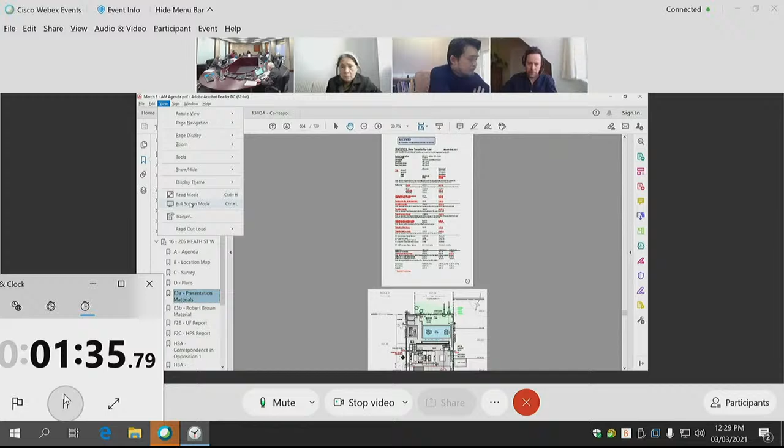Included in the package are some maps that show the range of densities and heights approved in the broader geographic context. Those are maps that we've often presented. Thank you to committee staff. That's the map showing the density numbers, and then there's another map right after it that shows heights. I would just say there are a range of both densities and heights approved in the area.

Both of the numbers, if we just look at the numbers, would fall within the range of those approvals. There are heights exceeding that sought by ours, and we've charted some of the heights there. FSIs all above 0.7 into the high 0.8s, and even further north in the neighborhood, some that are over 0.9. So just the numbers themselves, we think, fall within the range of the approvals.

From a qualitative perspective, I just wanted to talk about the FSI and height again from that perspective, because I think that matters as well. The numbers tell only a part of the story, as the committee knows.

The site plan that's included, and I thank committee staff, if I could just go back up to that site plan, there's a dotted red line on these site plans that we prepare. It shows for you, the committee, the permitted envelope based on front yard setbacks, length, depth, side yard setbacks. You'll see on the right-hand side it says permitted outline. So that's what would be permitted in terms of a house today.

I would just note that only the one-story portion projects beyond that permitted envelope, and we've highlighted that there's the one-story projection being hatched. It then goes to the outdoor platform area at the rear. The two-story portion actually has a length and depth of just about 18 meters, depending on whether it's length or depth. So only marginally in my submission to you above the length and depth that you would see permitted for the two-story portion of the house.

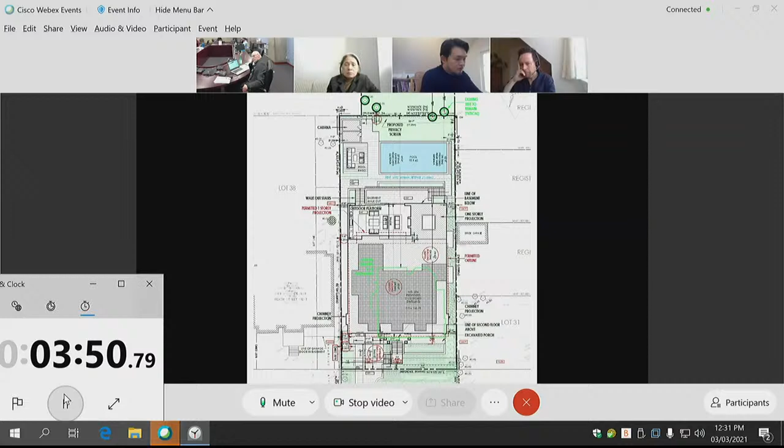And so it's been well set up on this lot, we believe, in terms of its adjacencies. In terms of height from a qualitative perspective, I would just say to the committee, it's an odd stretch. We don't often have situations like this. There's only 3 lots on this south side of Heath. And 201 Heath, which is immediately adjacent, does have that approved height of 12.72 meters.

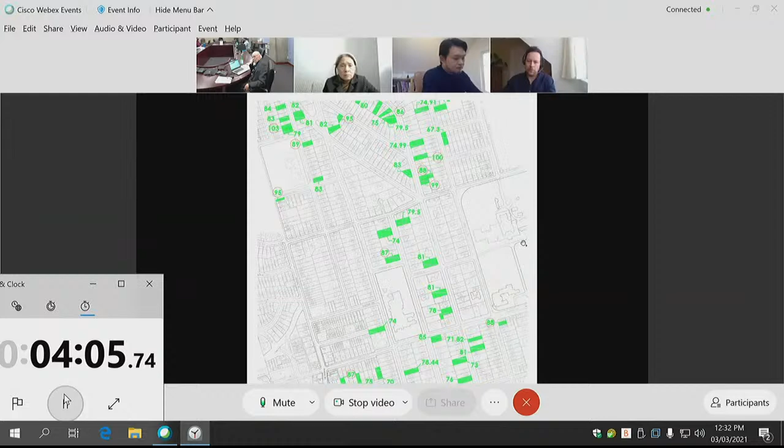And so we think in terms of just these 3 houses on the street, numerically the height obviously exists, but it's actually going to match up well and be compatible with its adjacent neighbor, and therefore respect and reinforce the existing character of the neighborhood. The next house is then the flankage house on Spadina, so you don't have that same adjacency.

We understand some concerns at the rear about landscaping. I'm happy to talk about those in terms of questions from the committee. But I would just note that the one-story portion is 16 meters from the rear lot line, and it's another 6.5 meters to the two-story structure, for a total of 22.5 meters. So quite a distance from the rear wall of the two-story or 2.5-story portion of the house to the rear lot line. I'm just over my 5 minutes, sir, so I was going to stop there.

No, sir, I just said the same thing. I know my 5 minutes is up, and I was just going to stop there unless there are any questions from the committee.

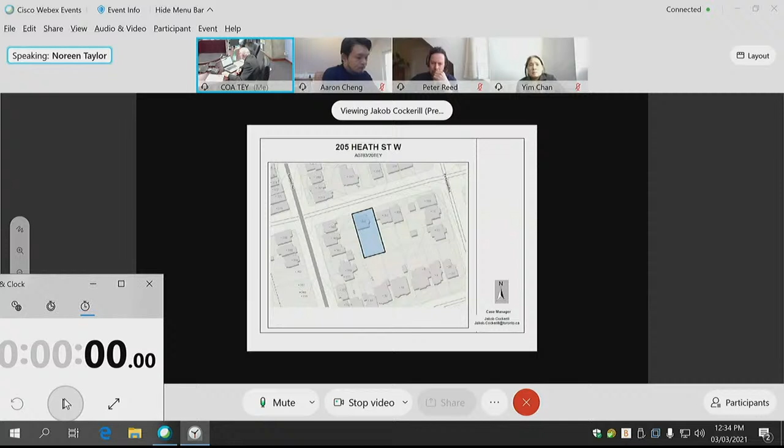Hello, it's Noreen Taylor speaking, and I live directly across the street, actually across the street on a slant. I'm Noreen Taylor, and I am the owner of 208 Heath Street West, which is directly across the street.

I also should say that I knew the former owner, Mrs. Bennett, who lived at 205 Heath, and she was my friend and a great gardener, and that colors some of my remarks. I've lived in my home for over 30 years.

From reading the letters submitted to this committee, it's clear that the consistent objection to what is being presented is that the variances are not within the realm that should be considered in this forum. The request in item number 10 that the floor space index variance of 0.87 times the area of the land is not a minor variance. This especially when the permitted floor space index is 0.35 times the area of the lot.

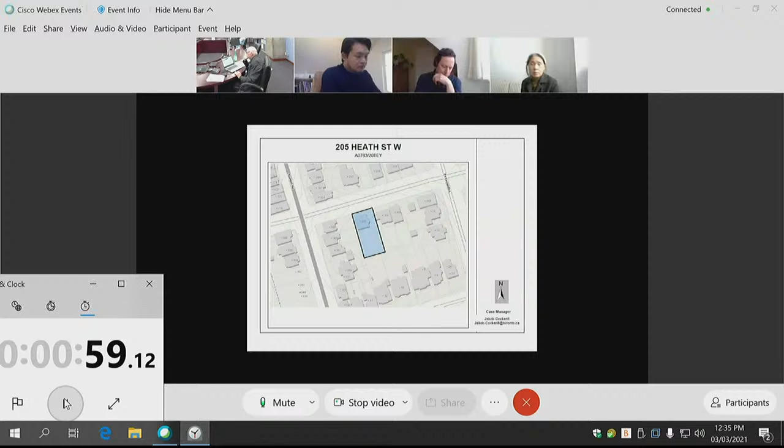While there might be examples, and Mr. Wengel's office assures us that there are, of 80+% coverage in the neighborhood, it must be plainly stated that there are no examples of this extent within this little neighborhood. The residents of the area in question, it's a very small block that has maybe 5 houses on the north side of Heath Street, 5 houses on the south, a few houses on Parkwood, and the same low a number of houses on Shorncliffe.

By changing the nature of this house, by having this variance be exceeded so much, it really is going to be changing the nature of what this city is about and what this city block is about. Again, I've been in this community for over 30 years, and I didn't want to live in a place with palaces. I wanted to live in a leafy garden setting.

Directly across from this person, I have a lot that's roughly 84 feet in dimension. If I were to apply the same kind of building variance required, we'd be looking at an entirely changed community, and I'm not so sure this is the direction that the City of Toronto wants to go to. We're looking at creating greater density for people, not looking at creating palaces for people.

One of the residents on the street, Mr. Lee Weston, used the word leafy to describe the ambience of this community. And I would suggest, as you look here at the nature of the lack of garden where the pool is, which has now been changed in subsequent iterations I've seen, the amount of green space is negligible. I have concerns about how water will drain if everybody in this neighborhood has the same amount of built form. I'm not sure our sewer systems will be able to cope or where it will drain off to.

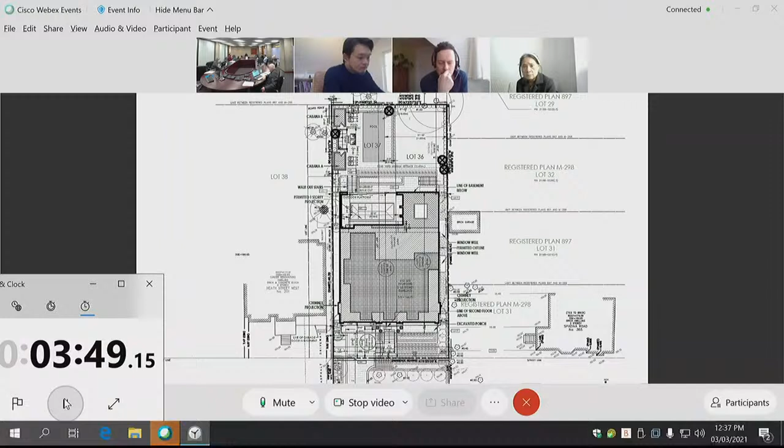I suggest that the building of this sort does not keep to the original zoning criteria and is not what the city was designed to do. I'm suggesting that this application be either deferred for neighborhood consultation or in fact be applied for rezoning because it is at such great variance to what is currently in standard. Thank you.

Hi there, my name is Wendy Sokoloff and I'm at 6 Shorncliffe. I'm here to request an adjournment because we just received notice, literally on the weekend, about this hearing taking place.

I have spoken, although I heard from Mr. Bronskill that he has contacted neighbors. I have never been contacted. No one has ever spoken to me, and I can say that I'm home quite frequently. There's always someone home. No one has ever come to the house. No one has ever called or contacted me. So I want to be clear about that because I would have had something to say had anyone contacted me.

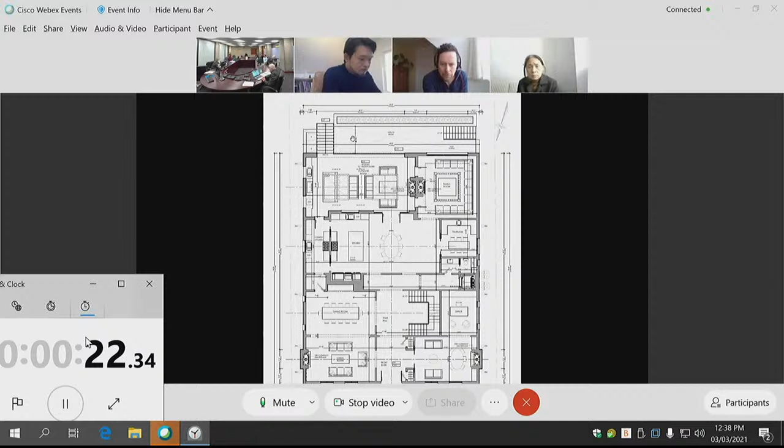I can also advise that my neighbors to the west, number 10 Shorncliffe, the Murskys, have also similarly never been contacted.

We're unaware of this hearing for today. They are out of the country and not able to return currently, but they have already told me that they also never received notice of this hearing, and they would also like to have participated. By the time I noticed, I could not submit all of my objections by the deadline of Wednesday, Feb 24, when I just got the notice on the weekend. This is just not enough time. So I'm requesting an adjournment so I can review this more closely.

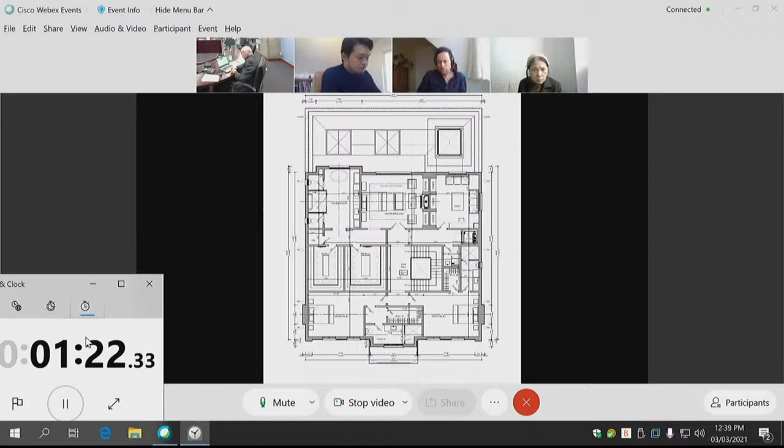I echo the sentiments of the person who just spoke before me. I would also be saying that two pool cabanas in the neighborhood trying to exceed the variances, the zoning for pool cabanas, just seems completely wrong and unrealistic in keeping with the neighborhood. It's Forest Hill. If you want a cabana and a pool, you buy a cottage. You don't do it in the backyard and impose on all of your neighbors, which is what it seems these particular owners are trying to do.

I can tell you as well, I don't have clear... Yes. That's true. That's fair. That's fair.

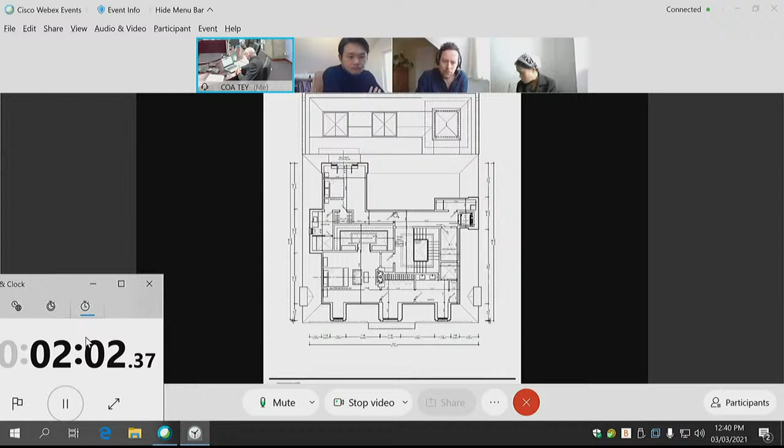I would like the opportunity to review this matter more closely, and so would my neighbors at 10 Shorncliffe, and at that point speak with the architects, Mr. Bronskill, directly, and deal with it that way before we can prepare submissions in regards to opposing or not this application. But I'm certainly not prepared to do that today, given the short time frame of the notice.

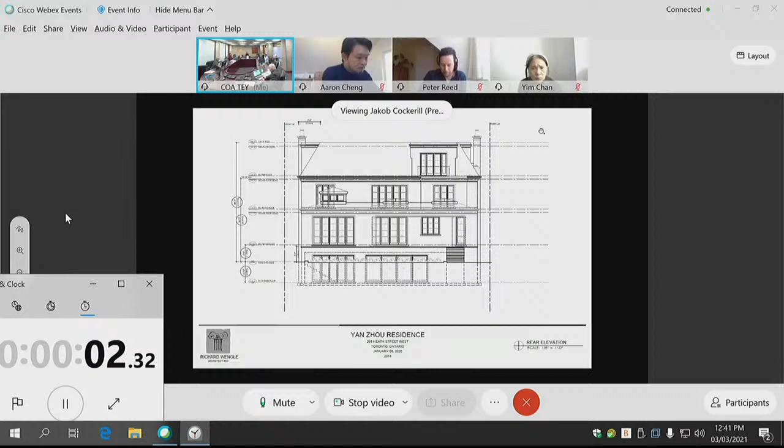Thank you, sir. We would not be supportive of an adjournment. There's a fine line between consultation with immediate neighbors and going out to the entire community. The architects did drop off letter packages to the most immediate neighbors, including 10 Shorncliffe, which was mentioned in the submission before you. Our client has had extensive discussions with the neighbor at 12 Shorncliffe, as well as other adjacent neighbors. 6 Shorncliffe is further removed in my respectful submission. We relied on the mailing of the notice. It was sent out, as we noted, in compliance with all legal timelines, so I'm not sure that we can do much more than was done in these times. We would not be supportive of a deferral at this time. It would be extremely prejudicial to our client.

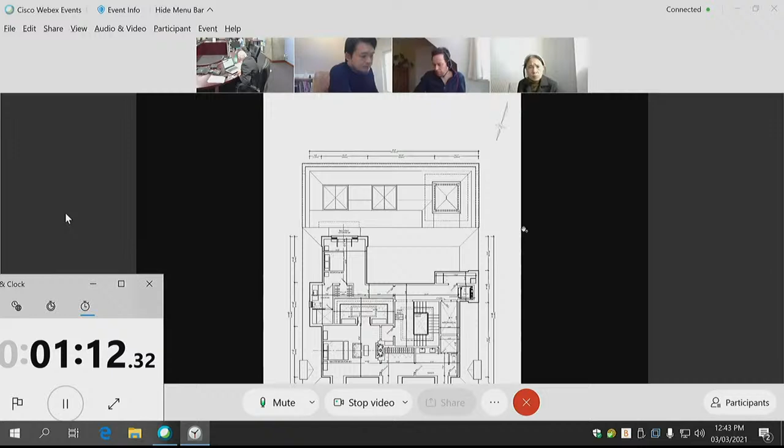No, because if you look on the maps, sir, 6 Shorncliffe, although it's on the block to the south, is somewhat removed from the site. So we went to the most immediate neighbors, 10, 12, and 201 Heath, because they're most directly impacted. So a package was not left with 6, but it was left with 10 and 12, as well as others.

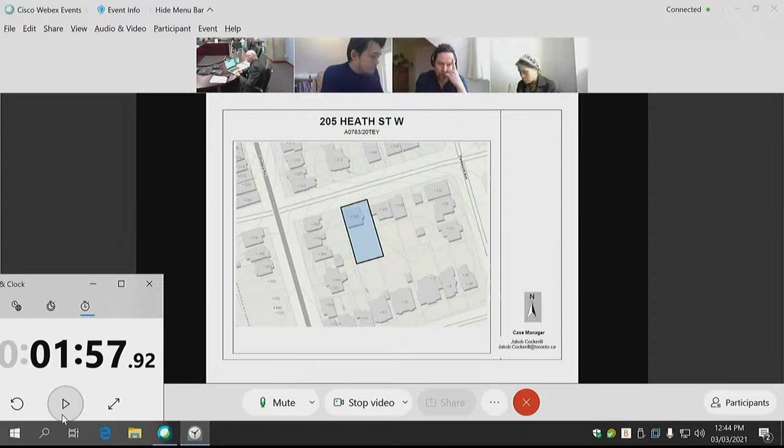No, and so absolutely, absolutely, yes.

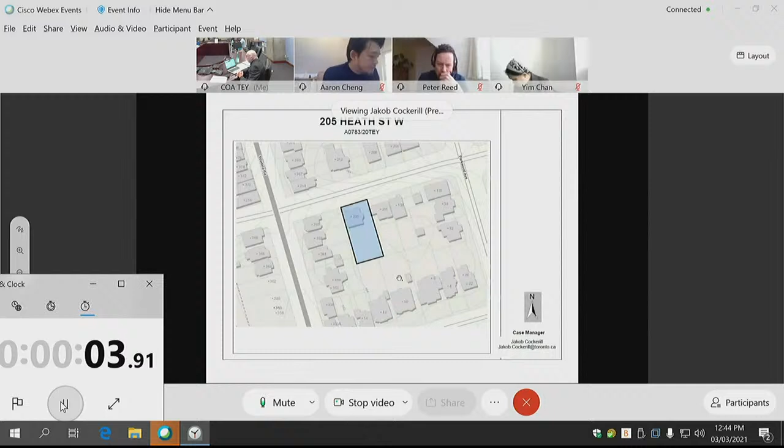Good morning. My name is Audrey Loeb Ross, and I'm here with my husband, David Ross. We are the neighbors at 12 Shorncliffe, so we abut on the south side. I'm just explaining who I am.

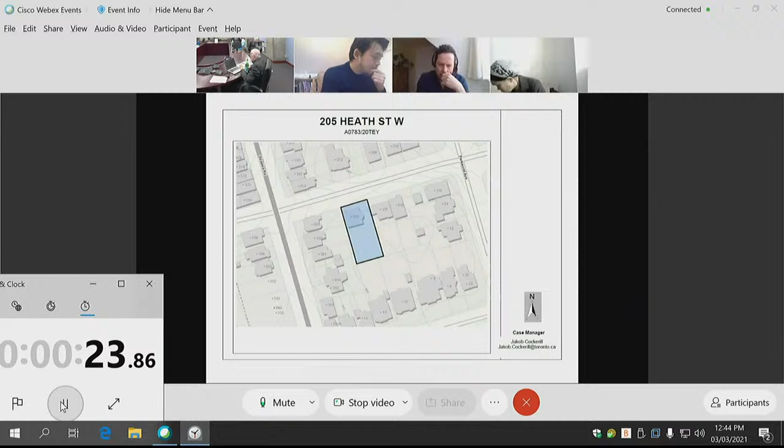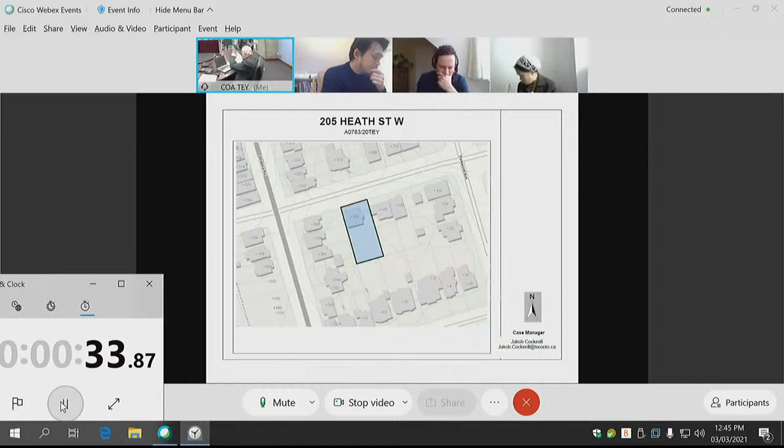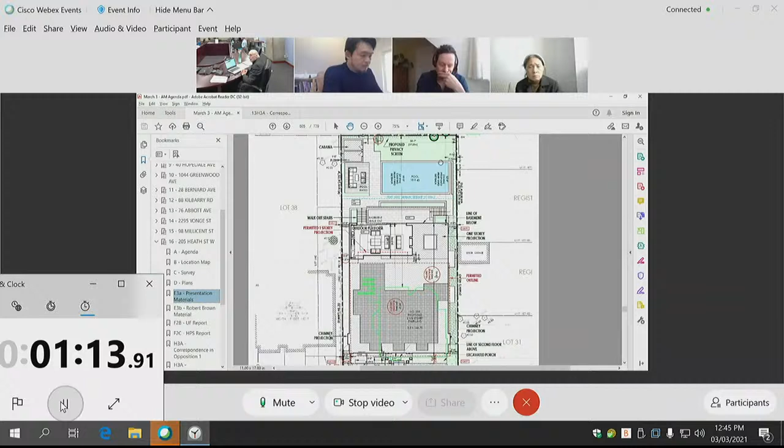We would like to ask for a deferral, and one reason is because two of the plans shown here today are not the same. In one of the plans posted, the pool is going vertical north-south, but the one that Mr. Wengel's office spoke to has the pool going east-west, much bigger, and has removed all kinds of landscaping. So this is the one we saw, the one you have up on the screen, but then there was another one the presenter showed, and this is not the configuration of the pool, and the cabanas. If you keep going through this, you'll see there's another plan he showed, which we were sent, which shows the rear differently. So you can see this is different than the first one. The consultations we had with the neighbors did not go well, and we would ask for a deferral.

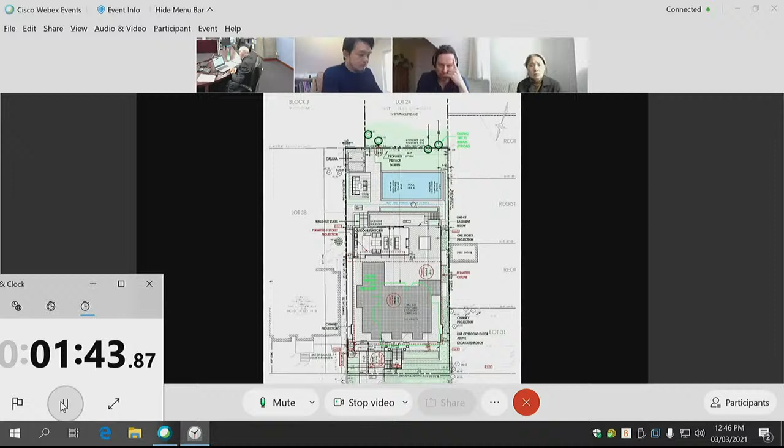Hi, I would favor a deferral. Also, the previous caller referred to the pool - which is the orientation of the pool, east-west or north-south? Well, the plan that I'm looking at has it oriented north-south. If it's different, I doubly would like a deferral.

Sir, there's no variance required for the pool or the landscaping. The pool shown in the east-west orientation was shown as a compromise. Our instructions are to stay with the site plan on file, with the pool in the north-south direction. I still would prefer a deferral.

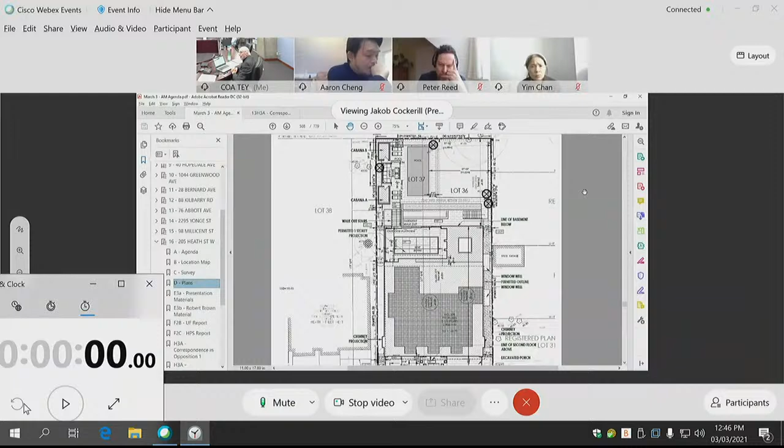Yes, regarding the deferral, I just wonder, because there's a revised date, the variance, and also it seems there's a revised site plan too - are these being distributed to the neighbors before the hearing, or?

Oh, okay. Okay, I'm waiting. Okay. Okay.

Sir, if it's Mr. Richard Wengel, it's Mr. Bronskill speaking. He's the architect on the file, and we had indicated to committee staff that for efficiencies, I would be the one speaking, so I'm not sure he's there to sign into WebEx to be able to speak.

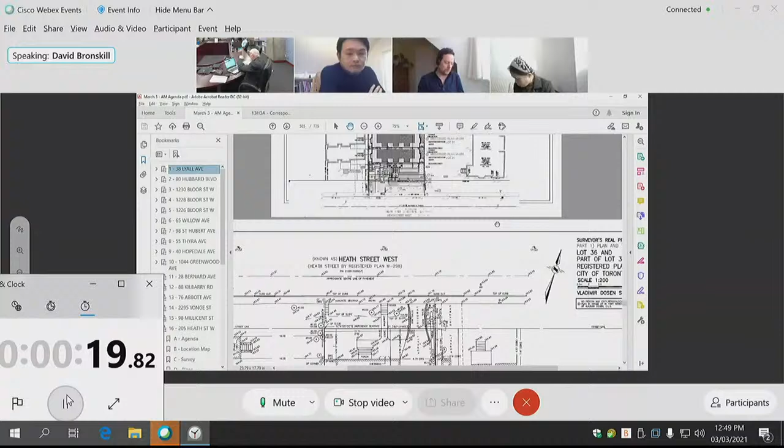Mr. Chair, it's Mr. Bronskill. There are others who spoke to the deferral after me. I was wondering if I could just take 45 seconds to respond. Thank you for the indulgence. There were letters, sir, dropped off to 199 Heath, 201 Heath, 208 Heath, 212 Heath, 214 Heath, 359 Spadina, 361 Spadina, 363 Spadina, 365 Spadina, 10 Shorncliffe, 12 Shorncliffe. That's a fairly robust notice consultation beyond the minimums that are in the Planning Act for this panel, and I think that's the best you can do in these types of COVID situations is to reach out.

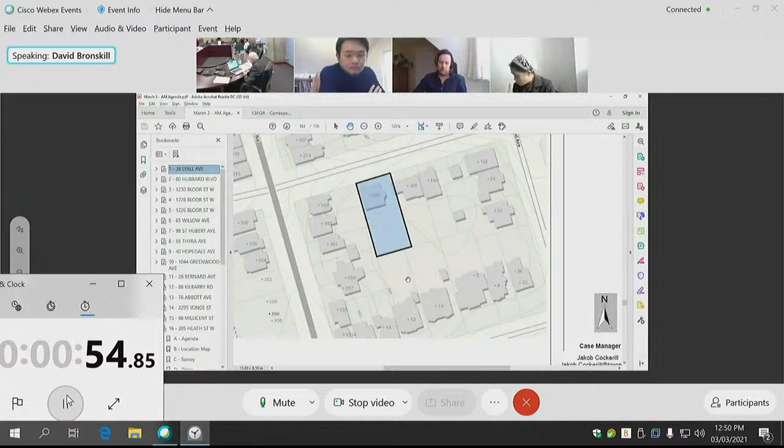It did trigger conversations, as Ms. Loeb indicated. Those conversations, she characterized as not going well. I would characterize them as not reaching a resolution. That happens. There are no revisions to the variances before this panel. The pool orientation is not the subject of a variance. There are letters of opposition and people here today who are prepared to speak to the plans on file. I would just respectfully say a deferral here won't serve much of a purpose. I think the lines are drawn.

I respect the different opinions. Consultation has occurred, notice has gone out, we are not making revisions to the variances. I just don't see the need or basis for a deferral, which would just cost 3 to 4 months and bring us back, in my respectful submission, to where we are today. Thank you.

I have a question. Can I ask whether, in that case, will you remove your new site plan with the different orientation of the pool from the presentation? Because that will be very confusing.

Although it did not require any variances, it's based on the original site plan, not the revised one. That's a fair comment, Ms. Chan, I appreciate that. If, for example, the committee at the end of all of this wanted a condition about building substantially in accordance with the plans, we understand the site plan on file shows the pool in the north-south orientation. That is the site plan that would have to be substantially in accordance with. Our client understands that, I appreciate the question. That's the site plan that would be quote unquote approved should the committee get that far on this application.

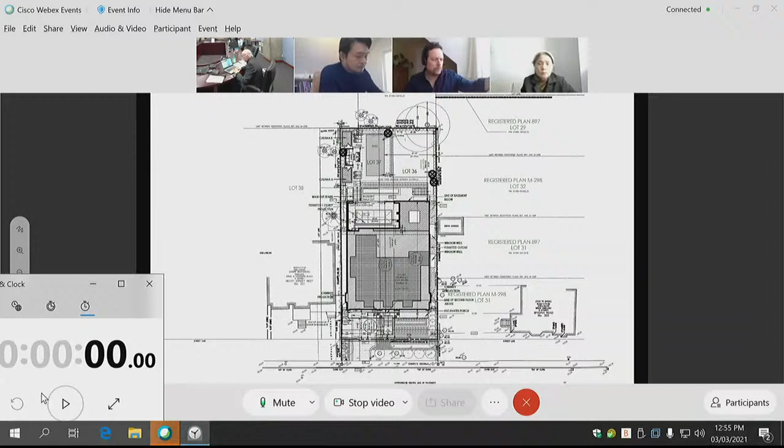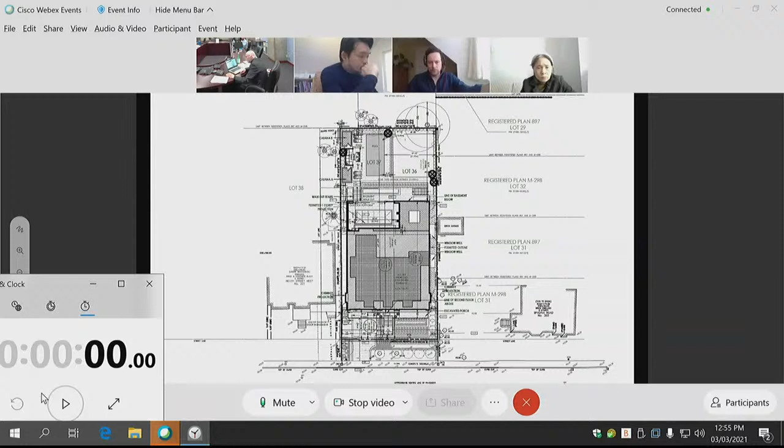I'm primarily, oh sorry, am I on mute? Hi there, I'm primarily objecting to the 2 cabanas that are being built. Is that better?

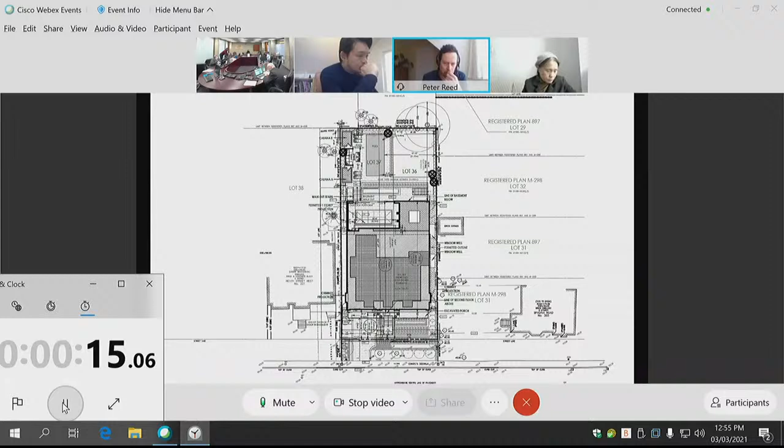Okay, thank you. I'm objecting to the increase in variance for the 2 cabanas. There's no reason for it that I can see. In keeping with the neighborhood, the cabanas are huge, oversized in relation to a home, that they're asking for variance in zoning in regards to size as well.

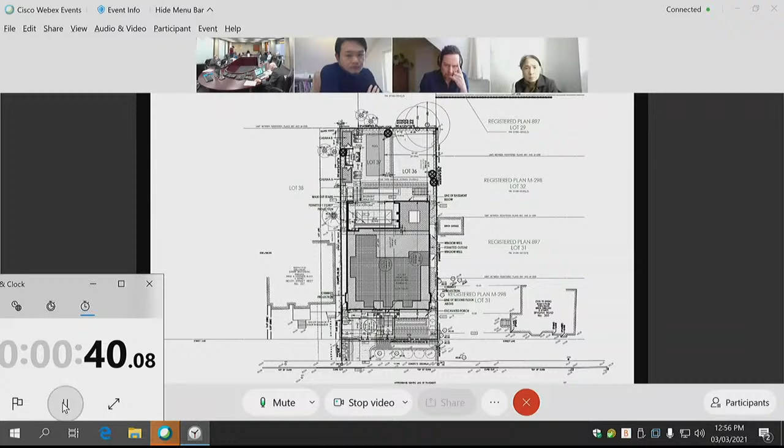If you look at the basement, which is also what they're asking for an increase in variance for, there's ample room in there for what's called a storage unit, which is one of the cabanas. The second cabana that they're proposing is for a bathroom, and there are already 2 bathrooms very close to the exterior of the home.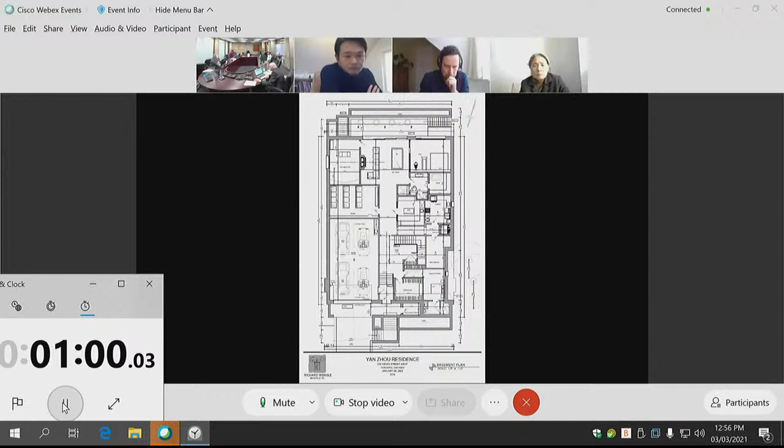So my position is that the height is just extraordinarily high. It does impact on the neighborhood. It exceeds the height of a 7-foot fence substantially.

There is nothing, when I look at the site plan that I have—if you look at what's being proposed, it looks very insignificant. There's just a couple of lines. There's nothing that you can actually look at in that drawing of the cabana that gives you proper and adequate information as to what it's really going to look like.

I was waiting for and expected to see some drawings in terms of what the finished product is going to look like. I don't see anything. That's respectfully almost a child's caricature of what the cabana is being proposed to look like, keeping in mind that the site plan we have is incorrect with the north-south pool.

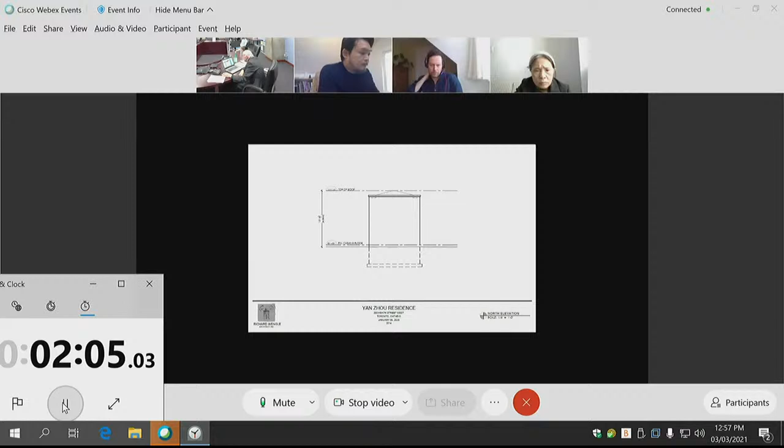I don't know if this is actually what they're proposing, but the height of it exceeds my fence and is extraordinarily large. I don't think Forest Hill is the place to be putting extraordinarily large or increasing zoning for pool cabanas. That's opening the floodgates in my view, and I don't think it would work in this neighborhood.

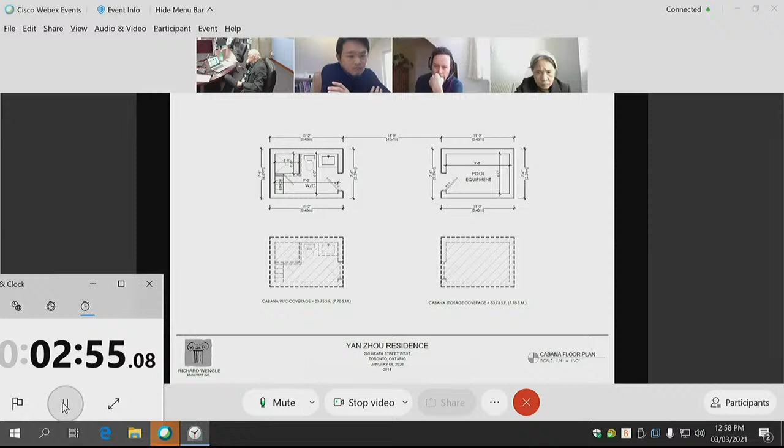I don't see any real drawing in relation to the 2 pool cabanas and what it's actually going to look like, other than the drawings which have been submitted, which I'd say are insufficient for us to have any actual understanding of what these 2 cabanas are going to look like, and why we even need a variance, given that they are asking for, as part of this application, the dugout basement, which is absolutely huge. I'm sure it already has room for 2 storage units in the dugout basement.

I'm sure if the architect needed to, they could find room in the golf room, the mud room, the steam room, the theater room, the recreation room—all of which are in that basement—for storage for the pool. You don't need 2 giant cabanas, and you don't need a variance in regards to the zoning of cabanas in someone's backyard when it impedes on neighbors.

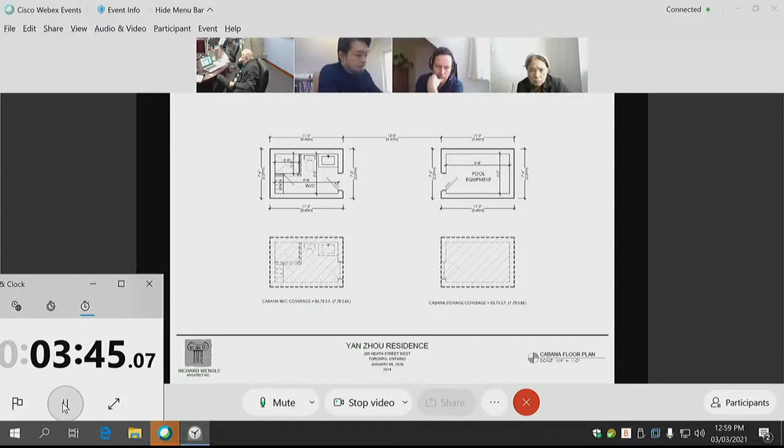And it is a monstrosity, an obstacle, an eyesore, and inappropriate for the neighborhood. That's all I have to say.

Oh, I have a quick question. I think it will help the other people who want to comment as well. Basically, what she just mentioned is focusing on only one variance, variance number 12: minimum requirement rear yard setback for an ancillary building. So basically, they never have a problem of being too big, it's just being too close to the rear yard setback. They're focusing on the items on the list.

No, I do have a problem. The setback is right up to the fence. Why does it? That's right. So I'm just trying to assist you, because when we try to analyze your comments and relate them back to the application, we have to do it in a more scientific way, to see what you are referring to.

So it seems like you have no comments in terms of items 1 to 11. The height, the main building—you don't have any issue about the main building. Your main concern is just the cabana. Am I right? Yes. Okay, thank you.

2 cabanas, yeah, that's right. Oh, I'm sorry, ladies and gentlemen, I'm looking at this site plan that was sent out. The space between the rear cabana and the back fence is 0.66, and yet this plan shows there's going to be trees between the cabana and the fence, which I find quite remarkable given the size of the space.

But I want to speak to the massing of the house.

This house is 87% coverage, and if you take all 13 of these variances, some of which are quite significant, like the 150% for the FSI, and put them all together, what might be minor variances individually become cumulatively enormous, and the impact on the neighborhood is significant.

The rear of the house, which we face on the south side of this property, is significantly higher than what is permitted and is going to have a negative impact on the enjoyment of our property. We did meet with the neighbors, and they were prepared to plant a few trees and fix the fence, and that was the consultation.

This house is a new build, and there's no reason the owners can't be more compliant with the zoning requirements. Some of the differences are 25%, 150% beyond what is permitted by the zoning.

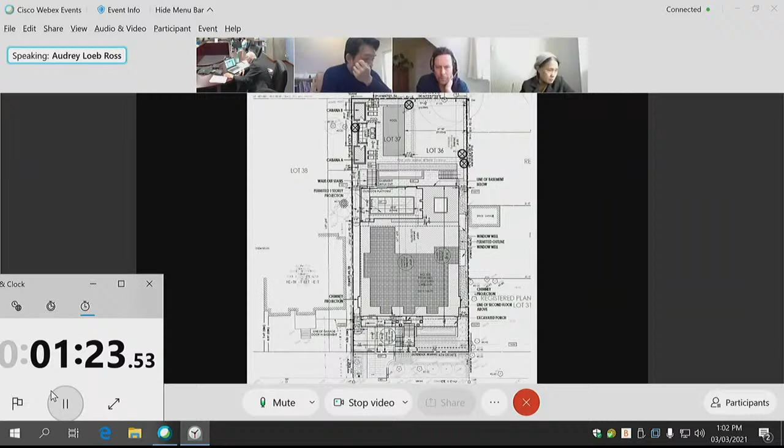In addition, the grading is changing to accommodate a 2-story garage, so everything is being elevated even more than what is currently there, and that is also going to have a significant impact. Mr. Bronski says there are other homes in the vicinity that are in the same range of size, but none of them are in this immediate vicinity. They're on Russell Hill and Dunvegan and other parts of the city, but not here.

Nobody has talked to us about the trees. The plans show 4 trees remaining; 3 of them are on our land, trees that are on our property. 1 of them is on their property. From what we can see,

they're removing all the trees in the back property. We haven't seen anything from urban forestry, nor have we been consulted. We've been assured the trees will remain, but nothing shows on any of the plans to indicate that. Now there is more green space on the plan in front of the committee than on the plan we were sent, where the entire backyard was paved. So this is a positive.

Our other concern is the stormwater drainage. This house is going to be above grade now. The properties run on a slope down to Shorncliffe Avenue, and both we and our neighbors have already suffered flooding from water runoff. We've seen nothing to deal with the issue of storm drainage and how the properties south of this one will be protected.

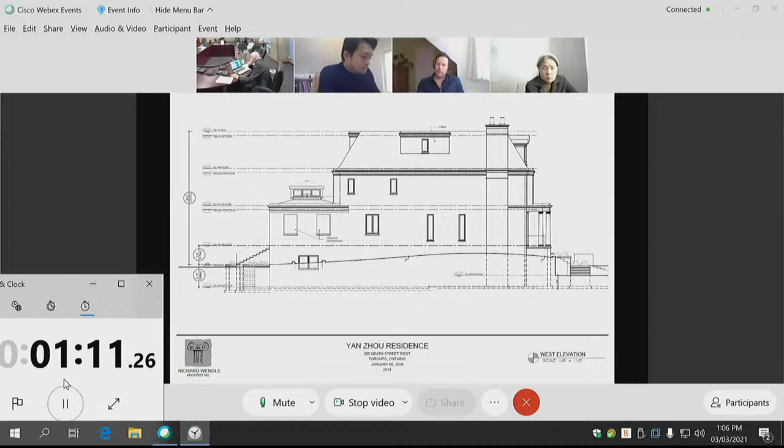Already in my backyard, which is adjacent to 199, if I stand in my backyard and the neighbor's standing in theirs, I'm about a meter below them. I'm already looking at somehow remedying this, and if 199 gets redeveloped, they'll follow the same logic—it should line up with 201 and 205. So that's what's going on.

The grade is a bit weird here because it's artificial. Heath Street is going to dive down towards Bathurst Street to cross the ravine at level. There's no bridge—they've just backfilled, so they cut down. I don't know why it goes down on the other side. So I think it's a bad idea to put the height increase on the second highest building between Bathurst and east of Yonge Street.

As for the density, they're at 2.5 times the permitted amount. That's like 2.5 houses, so I don't think it's a minor variance.

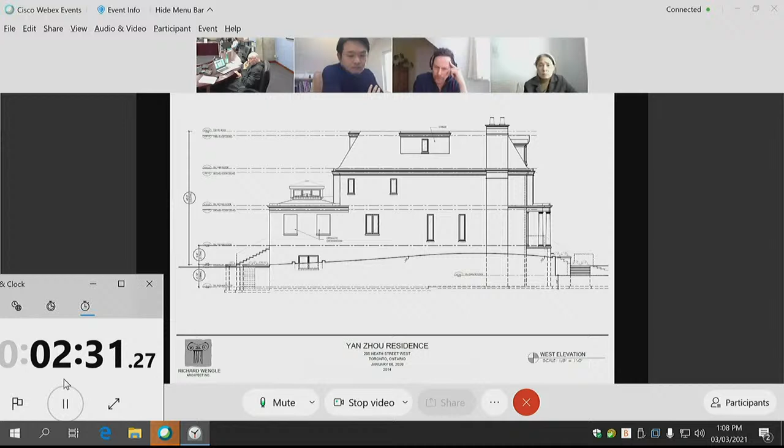But also that density, it's more than a number. It's a description of what you'd expect the neighborhood to look like. And so I look at this and I go, they've got this huge house. It extends 7 meters further back into the backyard than is permitted. Then they've got an at-grade walkout for their basement. That pushes the effect of the house further down. What do they do in the spirit of trying to keep to this idea of this leafy neighborhood?

Well, what little backyard that they do have, they paved a ton of it. The pool requires a hard surface around it. The cabanas may not be many square feet, but they sort of maximize the taking up of the backyard, making it un-backyard-like for the square feet.

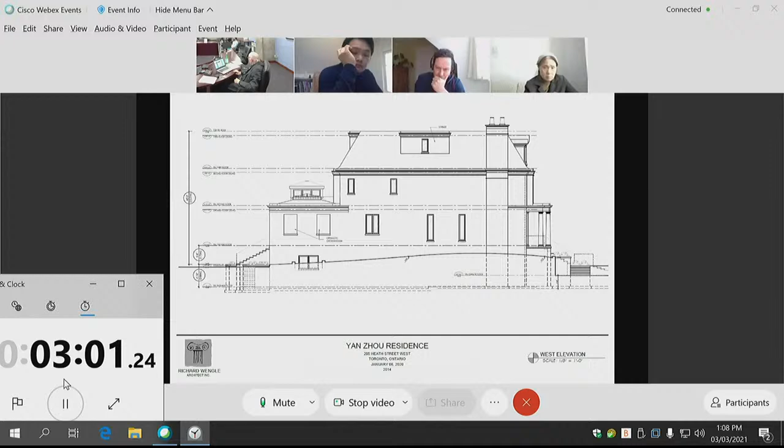I'd like you people to actually look at the site plan if they could. In the southeast corner, there's a part that has nothing drawn on it, really. There's the word lot 36. I'd like to know if that's grass. Anyways, I call that the designated grass area. This is not really at all like the neighborhood.

And the changes, the variances, as someone poked at the number of the variances and the things, end up with this. Well, to me, the backyard looks like a rooftop leisure center. So I don't think the height approval is appropriate. I don't think putting a house, which is the equivalent of 2.5 houses on the lot, is appropriate. But I don't think that they've come with the spirit of the thing, with the little backyard they have, of how they've treated it. So I'm against all of it. It's a lovely plan if the lot was much, much, much bigger, which doesn't really exist within city limits. Thanks.

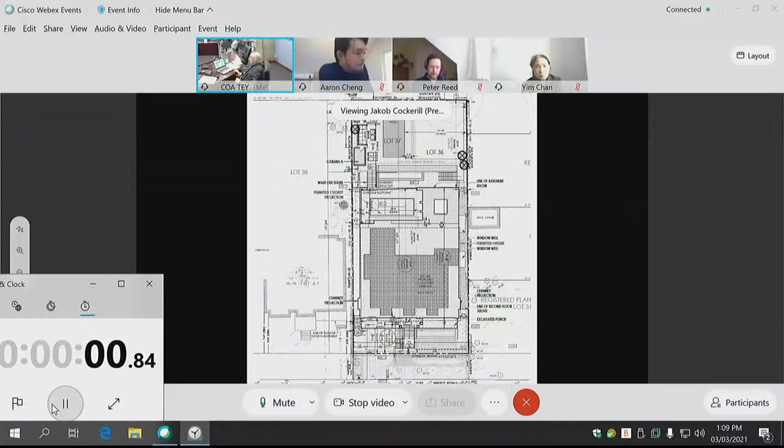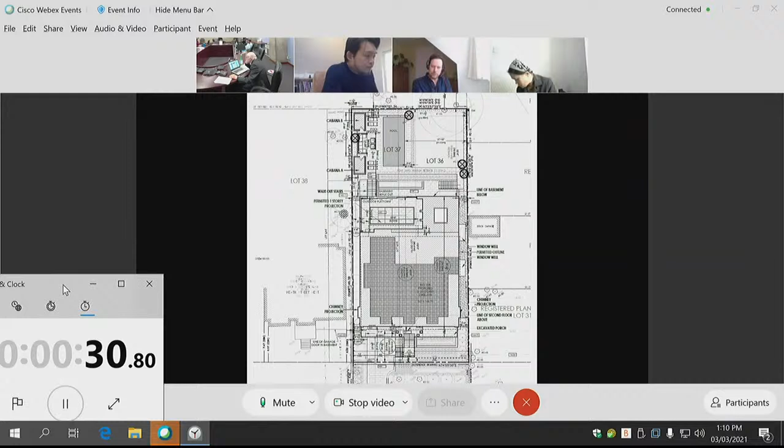I agree with a lot of what the last two speakers have said, specifically regarding variances 4 and 5, with the height, especially the one in back, which is usually an 8.5 maximum and is projected to be 11.72. Our backyard, we're at 361 Spadina, and our backyard goes directly into the backyard of this property.

We've been here for 29 years, and it's been like a Garden of Eden to us. We have a beautiful open garden, and the length that they're proposing, the depth, where previously maximum was allowed 17.0 meters, is now projected at 24.54, as well as on number 9, the depth of 19, now projected to be 24.32. This would mean we're looking at a wall that would come jutting past the brick garage you see on the right of your screen, further back than it had, basically blocking our backyard.

Also, as people have mentioned, number 10, the amount of floor space seems overboard, from 35% to 87%. There's also a concern about the trees on the border of our property. We have quite a few trees that are right on the line of our property. Some of them are partly on our property, partly on 205's property. So all of these concerns are great concerns for us here. Thank you.

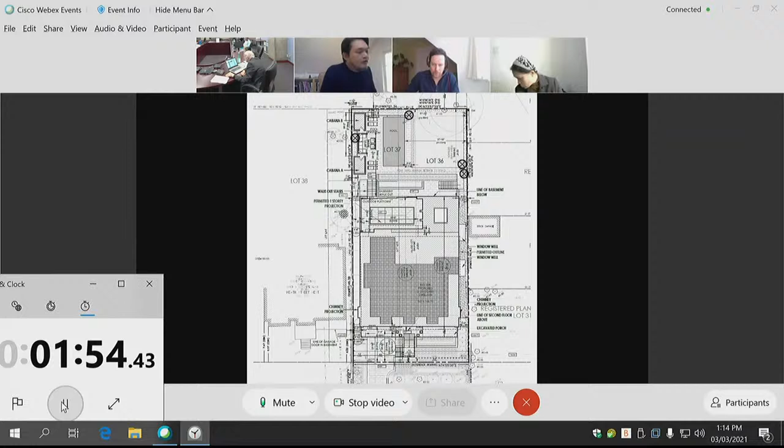And my client has made a proposal to Ms. Loeb. She has rejected it and instead asked for a significant amount of money to be put in her law firm's trust account by my client.

That's not acceptable, and that's not neighborly. It is a two-way street. Our client is prepared to continue discussions about landscaping even after the committee's decision today, but it is a two-way street, to be fair to my client. They've proposed additional trees. That proposal was not accepted by Ms. Loeb, but I'd hope that some more reasonable discussions could continue after today in the spirit of good neighborliness.

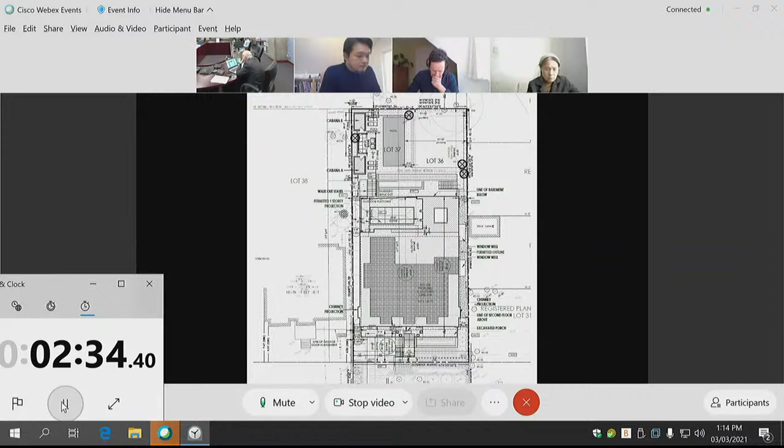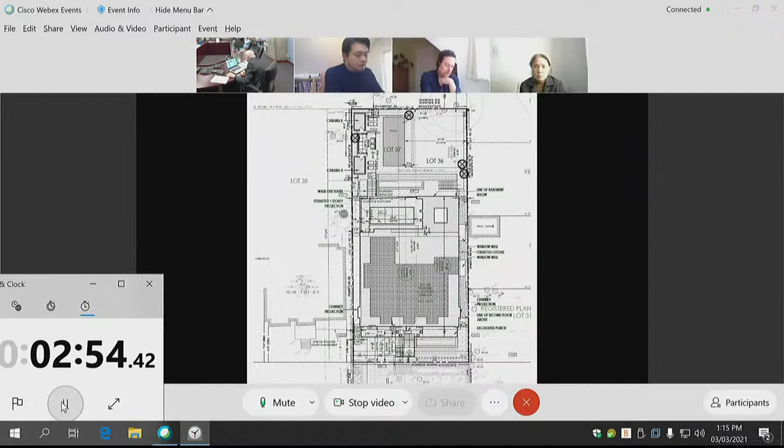I think a compromise could be found about rear yard landscaping, given that there aren't any variances before the committee for this. Stormwater obviously is part of the building permit. We will have to satisfy the city about any stormwater drainage and ensure that we're not negatively impacting the neighbors, and we will do that. That's all I intended to say in reply, unless there are questions, Mr. Chair, from you or the balance of the committee.

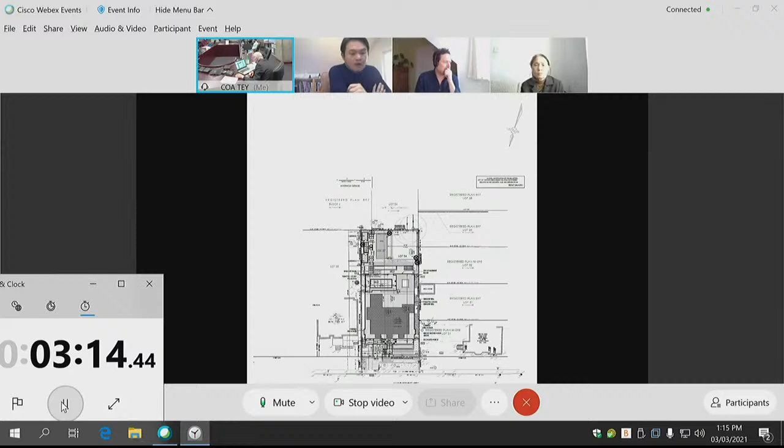For sure, and again, as I indicated up front, I always do it as both a quantitative and qualitative analysis. The numbers only tell part of the story, but we did survey what's happened within this geographic neighborhood and found similar numbers. It's a range, obviously, but both the FSI number and the height number fall within the range of approvals within this neighborhood.

If we just want to start matching numbers, you only have to go up a block to Montclair to find a 0.87. But I don't think that's necessarily the full or correct approach. It's also then the qualitative analysis.

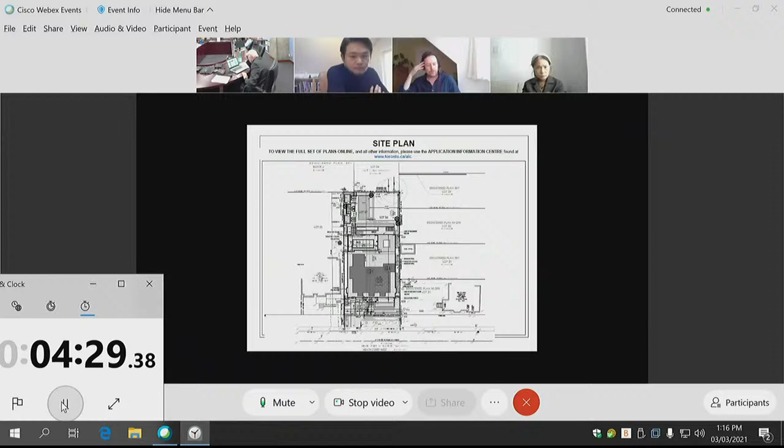In terms of the height from the street, that's why we prepared that streetscape analysis. As I said at the outset, it's an odd stretch in terms of the City of Toronto, where you only have 3 lots, and so you have to design the house to meet that streetscape on the south side.

In our respectful submission, we think that's clearly been done in the image that Mr. Wengel's office has prepared and provided. This is not necessarily translated onto other blocks, given the unique configuration of this block, where you've only got those 3 lots in terms of the streetscape on the south side. So we think both quantitatively and qualitatively, this is something that meets the 4 tests, sir.

Yes, so do you mind going, I know I said we're not looking at the presentation materials, but let's look at page number 7. You labeled this drawing as streetscape. So just to clarify, are you taking pictures of 2 houses and putting them next to yours, or is this exactly the neighbors next to you?

Yes, so those are photos of the neighbors. The center house there is 201. So these are the 3 lots. It's difficult to do, so I cannot tell you, through you, Mr. Chairman, Mr. Cheng, that this is 100% to scale, but it is very, very close in terms of taking the rendering.

And we know the dimensions of 201. Mr. Wengel's office has them both from the survey and from measuring them, and so we therefore know how it relates to what's being proposed for 205 in terms of first floor elevation, cornice line, roof line. And so we think this is very accurate.

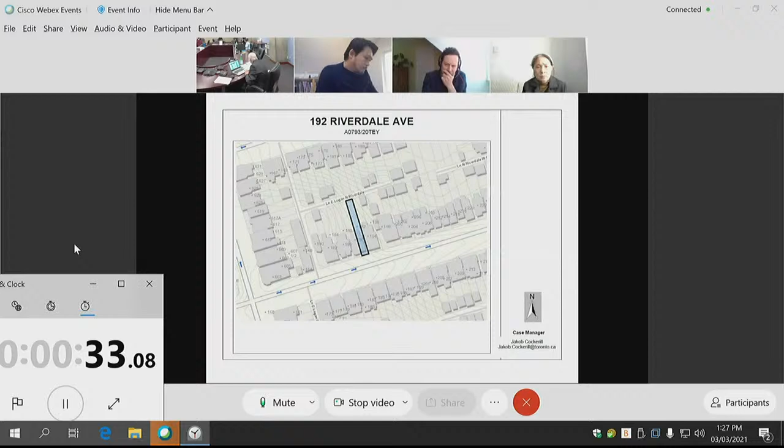Certainly, so we are seeking relief to the bylaw to create a two-story rear addition. The variances we are seeking today are in line with similar approvals the committee has made in the past. Our clients have spoken to many neighbors in the neighborhood, collecting 9 letters of support, and have also received verbal confirmation from the neighbors on either side. We've also submitted a support map to the committee to illustrate everyone our clients reached out to, color-coded to show who was in support, who gave verbal support, who signed a letter, and houses we knocked on but had no answer.

To go over our variances: when the homeowner asked us to design the new addition, they stressed that this was a property they wanted their family to grow in long term. This is a neighborhood experiencing a lot of growth, and with this in mind we attempted to limit our variances as much as possible. Although we are asking for 18.04 depth, we believe this is in line with similar houses in the area.

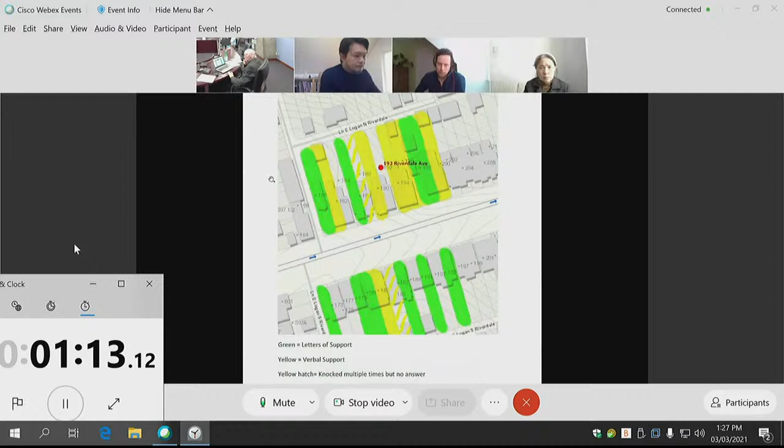There's also been applications that had approvals with between 18 to 20 meters in depth on the same street, such as 333 Riverdale, 305 Riverdale, 146, 104. So we believe our depth is well in line.

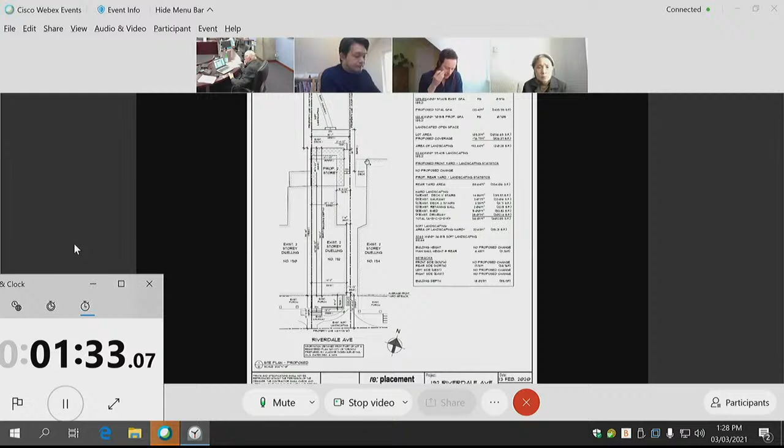And in terms of our GFA, we're simply asking for a difference in the bylaw of 0.015. Our total proposed area is 0.705. In the public notice, I believe it's been rounded to 0.71. The area allows for 0.69. So overall, that's only 2.85 square meters above the permitted, so very minor.

So with that said, and all the outreach that our owners have done to the neighbors, we believe this application to be minor in nature and is fitting well with the character of the neighborhood.

I can jump in. I think the application and the variances, I consider them minor, and it's a straightforward application. I will propose for approval.

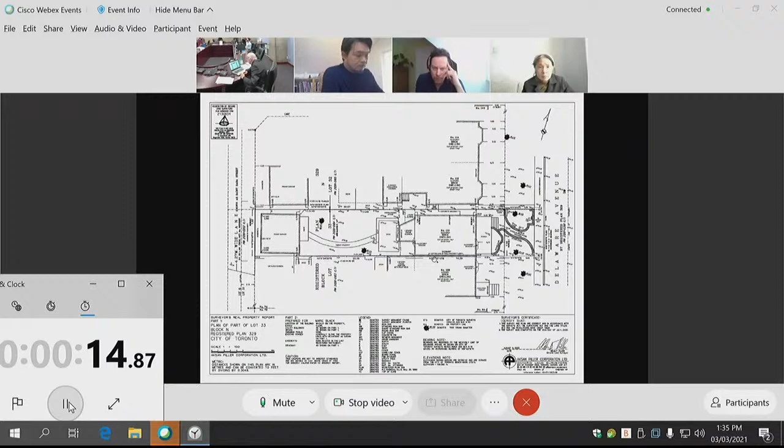Mr. Chair, members of the committee, our family has lived at 110 Delaware since 1989, 32 years. We want to completely renovate and enlarge our house to be more functional and energy efficient. For instance, there's no insulation in the existing house. As a smaller house on the street and being semi-detached, we propose enlarging to be more practical for current requirements and the increase of natural light. We plan to live there for the foreseeable future.

We invited immediate neighbors to review our proposal in September 2020, submitting plans personally to 108 Delaware; 112 declined. 4 neighbors across the street were invited just after receiving the public hearing notice. We submitted 5 letters of support.

We believe the design of the front maintains the character of the house and is in keeping with our immediate neighbor at 108, especially being attached, and with the forms of residential on Delaware: brick walls with secondary materials, sloping roofs, and dormer windows. For example, the front roof dormer we propose will basically match the roof and dormer window of 108, our attached neighbor. The existing porch will remain and be renovated.

The rear addition wall is proposed to be in line with the neighbors. First floor equal to 108 Delaware. Second floor is equal in depth to our neighbor at 112. The third floor addition is basically an enlargement of the existing roof on the original brick walls.

The rear west wall will be in line with our neighbor's wall at 108 with matching eave height. The proposed roof on the north will be 1 foot higher than the neighbor at 108. We propose a sloped roof skylight on the north side, in line with the main wall of 112 Delaware, which has no windows to any dwelling units.

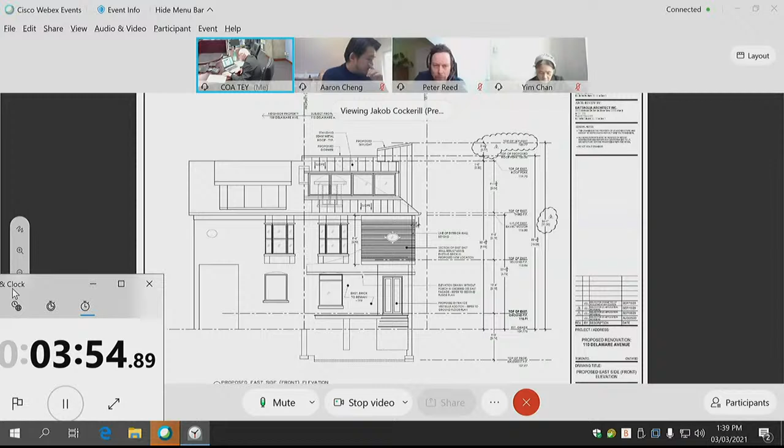Okay, it is indeed 9.23, and I'm going to explain why. The change from 10.23 down to 9.23 is a change received from city staff yesterday morning. The reduction of 1 meter is a favorable correction to the incorrect height stated on the public hearing notice. So that's a correction to a staff error. This is in keeping with recently approved projects at 11 Hepburn and 45 Dewson.

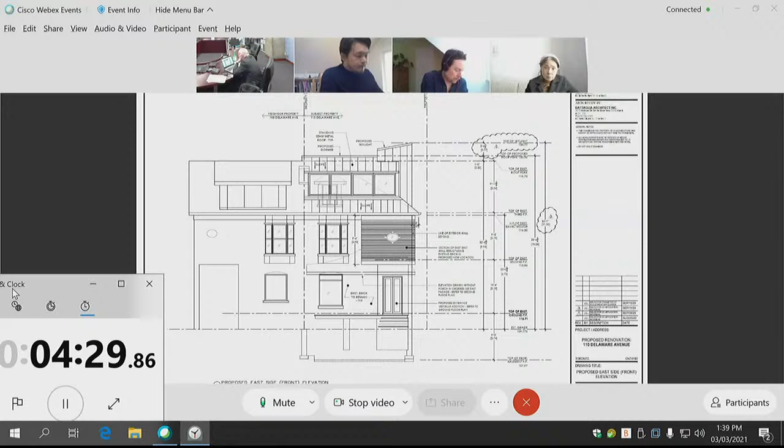Variance 5. The setback requested relates to the proposed garage, not, as stated on the public hearing notice, the altered semi-detached dwelling. This is another minor error in wording on the public hearing notice. We believe the request is minor regardless.

Variance 6 proposes an enlargement over the allowed area to the proposed garage. And finally, variance 7 proposes a very small bay window on the north side on the second floor, thus requiring a minor encroachment and setback variance, similar to 2 proposals approved at 11 Hepburn and 45 Dewson. That concludes my opening remarks.

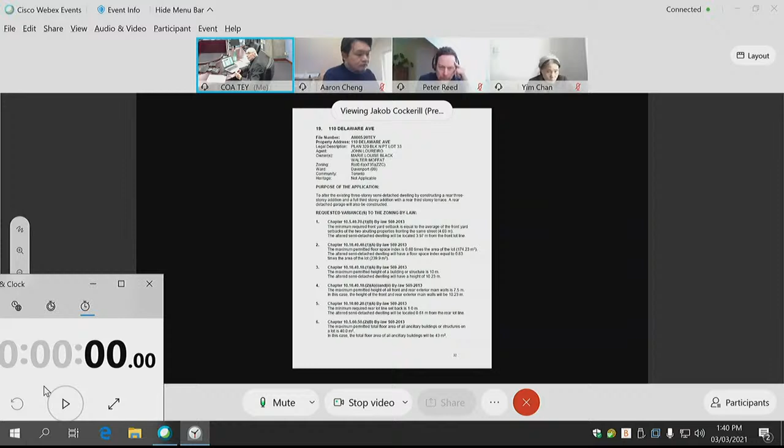Yes, hello, thank you. I would like, at the end, if there's time, to address some of the things that were just said that I don't necessarily agree with, okay? But I will just explain to you what my perspective is.

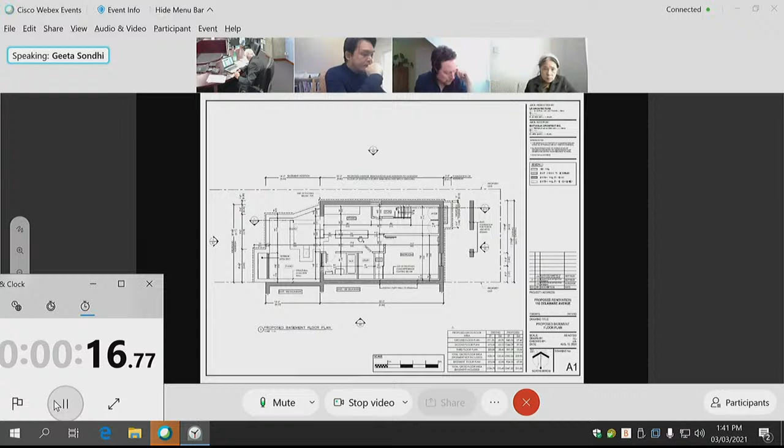My name is Geeta Sondhi. I live at 108 Delaware Avenue. I am in opposition to this application. It goes against the evolving aesthetic of our neighborhood, and I'm deeply concerned about the impact it would have to the structural integrity of my side of the semi-detached buildings at 108 and 110 Delaware.

I also have concerns about a lack of dialogue from the applicant, last-minute changes to the proposal, and misrepresentations of what's being proposed. The bylaw exemptions would allow for large, boxy structures that would create an incongruous facade in the front and a looming protrusion in the back of our semi-detached buildings, blocking my light, privacy, and view. This street is characterized by pitched roofs with dormers.

The proposal is to essentially transform a dormer into a massive third-floor addition with 10-foot ceilings. The shape would alter the roofline, create a lopsided facade, and increase the FSI, as has been mentioned. While the design could work well in a detached scenario, in this case, we are semi-detached. My neighbor's comfort would come at my expense and that of the street.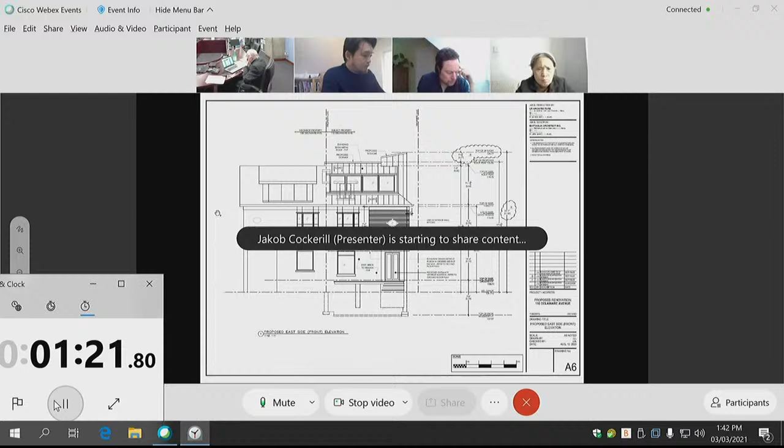To me, this proposal is neither desirable nor is it an appropriate development of the land and building. The massing of the entire proposed structure is out of proportion with my side, front and rear, and with adjacent properties. You've heard strenuous objections in writing from neighbors behind on Dovercourt, directly in front on Delaware, from both neighbors, myself and the one to the north, and others a few houses down. This proposal is out of sync with neighbors, and if approved as is, would set an unwelcome precedent.

My biggest concern is the structural integrity of my building. Currently, both 108 and 110 have pitched roofs, roughly the same height. Even at yesterday's hastily revised height of 9.23 meters from 10.23, the roof is still 2 meters higher than permissible.

I've submitted an opinion letter from structural engineers at the Martech Group. It outlines serious concerns about the potential negative impact of the proposed design to my house. These structural issues pose an unnecessary risk to my dwelling. Again, at 2 meters above the bylaw maximum, the increased wall height is not a minor variance, it's major.

Among other things, it allows the building of a roof just enough higher than mine to cause me serious problems. And if the drawings are a true indication of what's planned, I have to ask, why can they not comply with the bylaw? It would take a slight adjustment to the third floor to keep our roofs contiguous.

The proposed 3-story structure in the back is also problematic. It blocks my light, which is devastating, entirely eliminates my view to the north and northwest, and creates a sightline from the terrace straight into my bedroom.

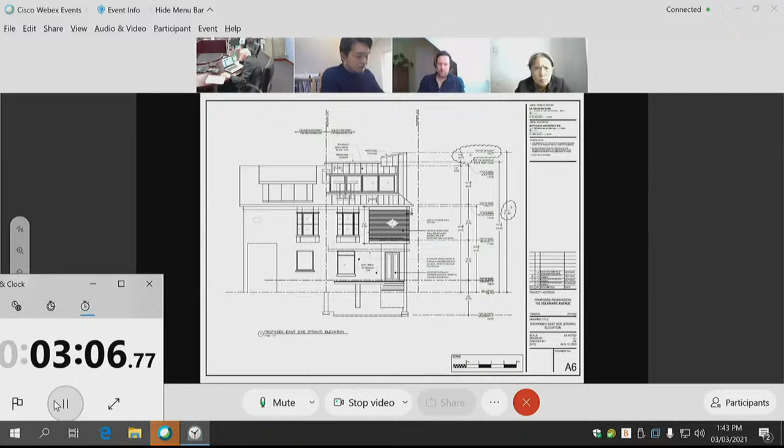A tree that comes onto my property, that I have no knowledge of being diseased, by the way, will be killed. And I have heard nothing from urban forestry about the huge tree right next to their existing garage. As we are all neighbors and live in a democracy, we place a high value on process, and I want to put it into the record that I feel my neighbor has tried to circumvent meaningful dialogue.

I have a time-stamped email proving he offered me the plans after handing them into City Hall. At the time I asked when I might give him my feedback, he said he wasn't interested as he didn't need it to proceed. Last week, following the submission of letters of opposition from neighbors, he offered to show me a model of what the proposed changes would look like.

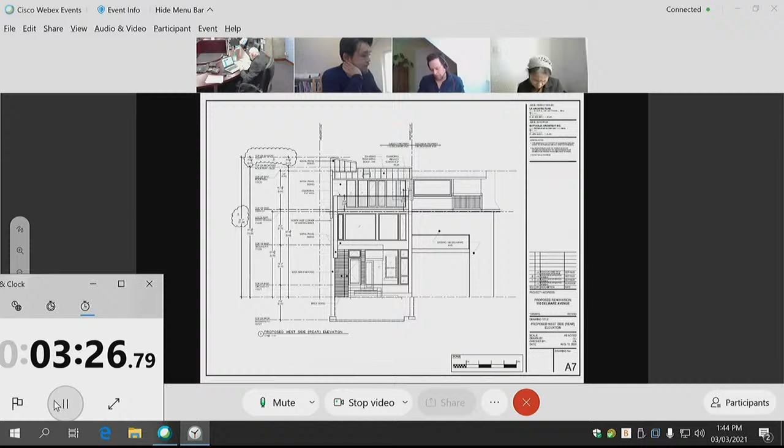It turns out the applicant procured his letters of support, all in his handwriting you will note, based on a gestural model that distorts the shape of my roof and dormer to match his proposed addition. My dormer has a three-pointed roof, but he has represented it as a flat sloped roof protruding from my roof peak in the model and in the plans. You will see I submitted some supporting materials, images 1 to 3.

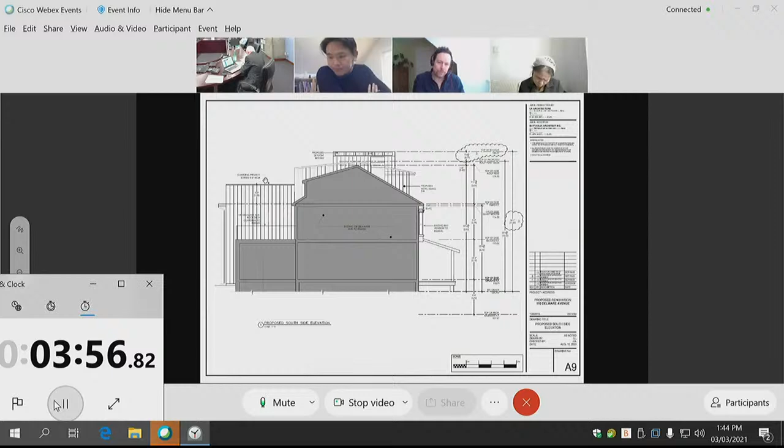I find these inaccuracies very unsettling, especially because they've been shown as factual to neighbors, some of whom signed his letters of support are upwards of 80 years old and English is not their first language.

In conclusion, we all agree that owners should be encouraged to invest in and improve their properties. However, this proposed almost full-scale redesign does not represent an appropriate development of the land and building. The defining variances are not minor, and it would be an undesirable addition to my home and other houses on the street. As such, I urge the committee to reject the request for these exemptions, or to defer decision until there is at least adequate time to review the hasty changes made to the application yesterday afternoon. Thank you for your time.

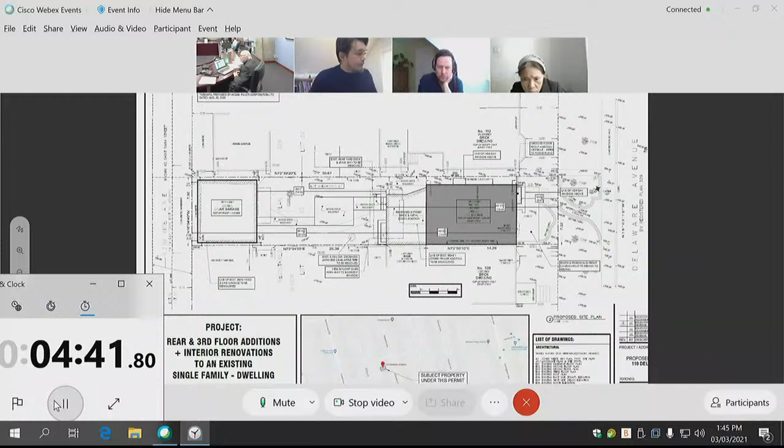Hello. I didn't change it. It was an incorrect statement by whoever wrote the public hearing notice.

Yes, that's correct. I thought you were referring to the wall height, which was very important. Okay. Yes. Correct.

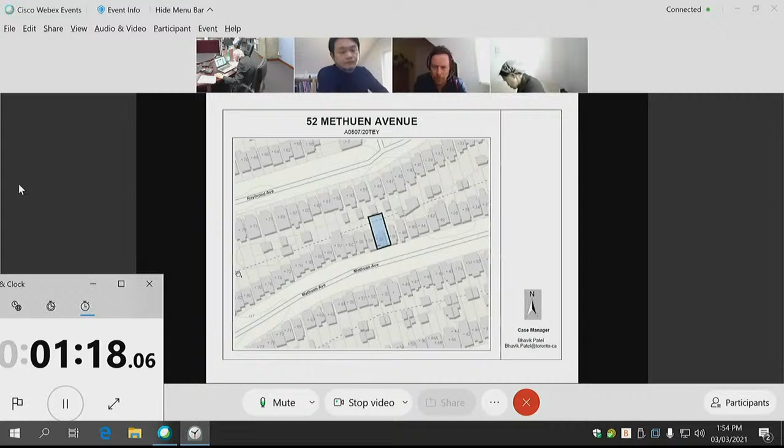With respect to the other variances, I did a clarification in a letter on February the 24th that was posted with regard to the side yard setbacks and the parking. Transportation is fine with the parking size. In fact, what's proposed now is going to be a foot wider than what presently exists. So in summary, in my opinion, what's being proposed here is very much in keeping with other builds in the area. And importantly as well, I think there's a lot of support from the neighborhood for sure.

I'll bring a motion. No real comments. I think this is a very restrained build that reflects depths of the adjacent properties, but also is more modest than other builds that have been happening in the area. So I think that restrained perspective helps it. I move a motion to approve with no conditions.

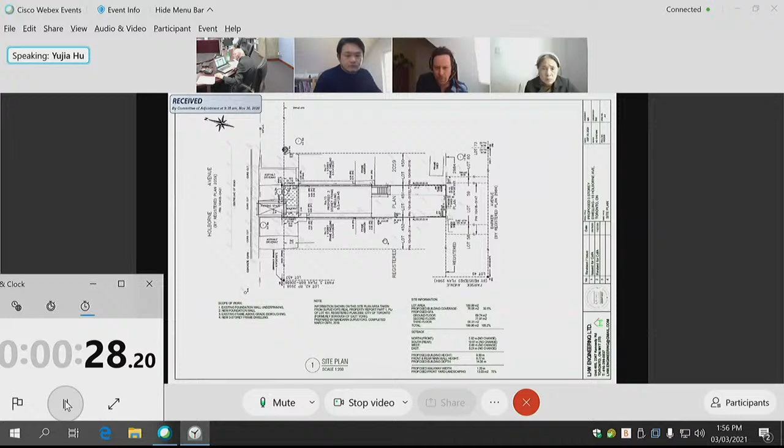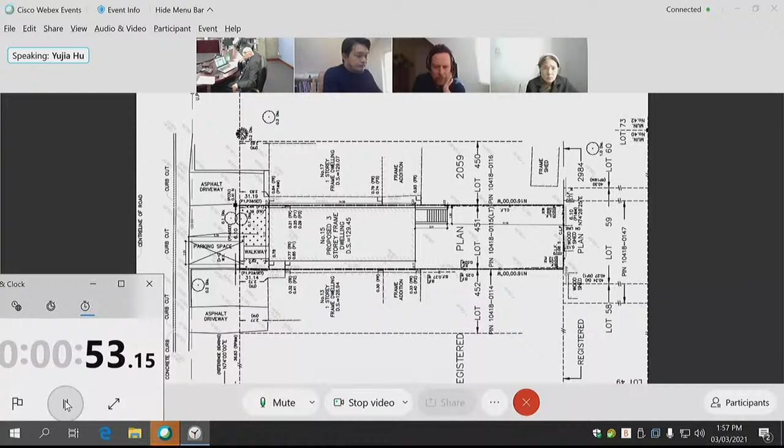In this neighborhood there's a couple of varieties of houses, and the proposed three-story house has its front and rear wall only at the second story ceiling, so it fits into the local environment. I also have some screenshots of other houses that have similar scale to our proposal, which I submitted. I can answer any questions if there are any.

Hi, can you hear me? So my concerns are the structural integrity of my house. When they start building, there's not very much room. I did submit a letter to you about that. And also another concern would be the parking.

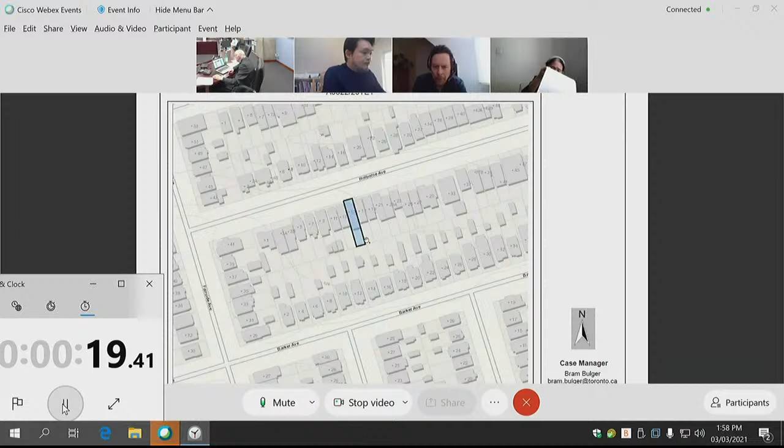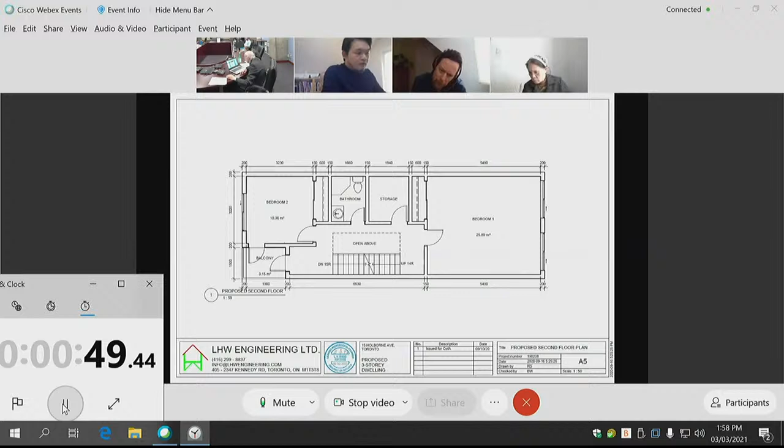If you're not having a driveway, our street is very narrow. And in the winter time when it snows, the snow plow initially takes up a lot of space on the street, so there's hardly any guest parking. The other concern I had was privacy. You're taking away a lot of our backyard sunlight, and we grow gardens in the backyard in the summer. So privacy, parking, sunlight, and the structural integrity of my house and the neighbor on the other side, number 13. That's all I have to say.

There is no opponent? Okay.

Okay, I'm going to explain these three. For the structural concern, actually we involve barely any digging in the foundation. Only the rear part has a partial digging. So I think there shouldn't be any worry about the structure, and during the construction we will make sure that everything is safe for both our houses.

For the parking issue, the parking actually doesn't change because there wasn't any parking space in the existing property, and the existing parking space is on the driveway, which is owned by the city. That's why there is that item on the zoning review, but it doesn't actually change the front yard, so the parking space is still on the existing driveway. For the sunlight, because this house has the same setback as the other houses, I don't think there will be any problem blocking the sunlight at the rear yard for the neighbor's property.